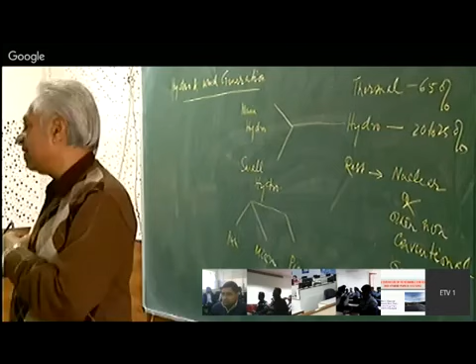It can further be classified into mini, micro, pico, etc., depending on the size of the hydropower station. Now, it is very obvious when we call this hydro generation, the turbine of a thermal power generation and the turbine of a hydropower generation will be different.

Now, when you have to generate power, you have a prime mover and you have an alternator, is it not? The basic principle is that through a prime mover you give rotational power to the turbine, and when the turbine is coupled with the generator alternator, it produces electrical power. So you need a prime mover and an alternator. The prime mover is basically known as turbine. So the coupled system of turbine and alternator is known as turbo alternator.

Turbo alternator unit, or we also call it a machine. So the turbo alternator machine or turbo alternator unit is the main heart of the system, which feeds the mechanical power to the alternator through the turbine, and the alternator produces electrical output.

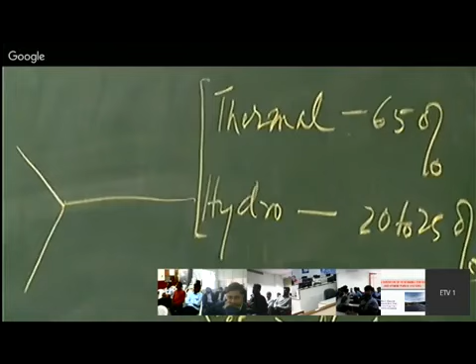Now the question is, if there are two types of generation, thermal and hydro, these are the main ones, of course. The machines will be the same, the principle will be the same, but they are different in configuration, in shape, in operation, etc. Can anybody tell me the basic difference of a thermal machine and a hydro machine? Suppose I have shown you one machine, say A, and another, B.

One is a turbo alternator unit meant for hydropower generation. Another is meant for thermal power generation. A is meant for thermal, B for hydro. Looking at it physically, can you tell that this is a thermal power machine and this is a hydropower machine? They are definitely different machines. Principally, they act the same way. But what is the physical or structural difference between the two?

Hydro machines are smaller as compared to thermal machines. Smaller. Speed is large. Hydro machines are run by a water surge system.

I am just saying that if you see the construction by its physical look, A is there, B is there. Can you say that A is a thermal machine and B is a hydropower machine? By looking at the turbines, by looking at the unit, I am saying.

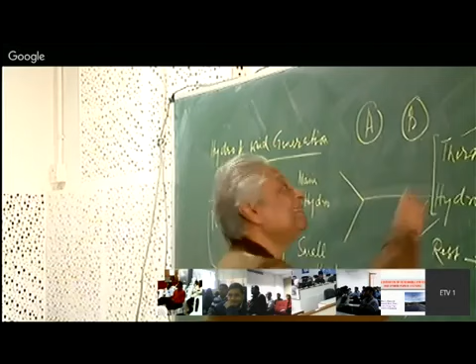The steam turbine and the water turbine, or hydro turbine. This is the steam turbine. The turbine which is used for thermal power generation is known as a steam turbine, and the one which is used for hydro is known as a water turbine. Now, it is obvious that the steam turbine will be a much higher speed machine, and that has to feed mechanical power to the alternator, that is, the AC generator of thermal power generation.

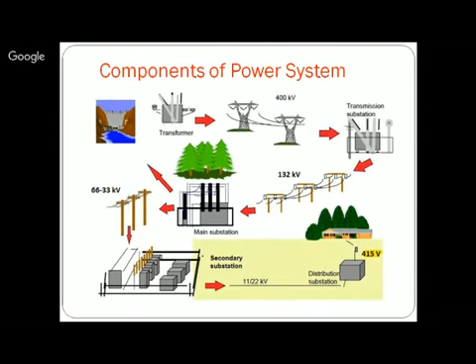Now these are the components of power system. You can very easily see the components are there, the fossils are there, transformer is there, then lines are there, then transmission substation is there, your transmission lines are there, 415 volt, secondary substation, etc. Next.

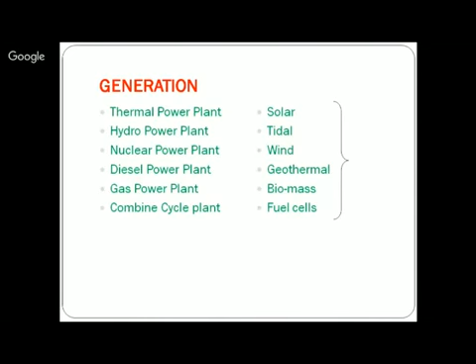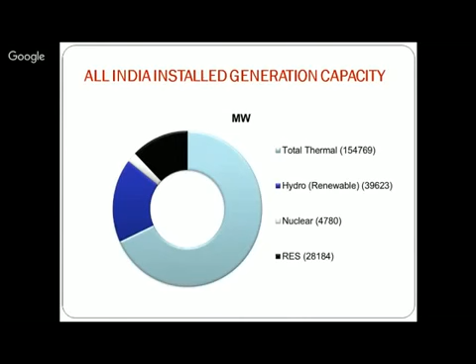Next, all India installed generation total is 15... This was earlier, I think 154769. Hydro was this much, nuclear was this much, and rest was this much. It's an old style. Next. Breakup generation. Installed capacity of power plants in India at the end of year 2013 was 2,33,929. But now it is 284. 284 is the latest. The thermal was 68%. The hydro was 17.42. The renewable contributed next 12.39 and nuclear only 2.1%.

So you know that although nuclear technology is a very old, established technology, its efficiency is very very less. आजकल हम लोग क्या बोल रहे हैं reactors, कौन से reactors? Nuclear reactors are there. Fast breeder, hybrid reactors. तो उसके अंदर न्यूक्लियर में आपका fission and fusion दो processes होते हैं. One is known as the fission process, the other is fusion. Fission process is the older one जो हमारा चल रहा है. When there is a bombardment, the nucleus is broken, and that radiates energy. उस energy को हमने use करना है for heating water, isn't it? Instead of burning coal, I am using this bombardment process.

और अगर इसको हम कूल ना करें, इतना ज्यादा एनर्जी आ जाएगा तो क्या कर देगा? न्यूक्लियर आपने पढ़ा है? So there is heavy hydrogen used to cool the process. Heavy hydrogen, heavy water बोलते हैं इसको. Deuterium, D2O, that is heavy water. Heavy water is used for cooling down. That means जो एनर्जी है उसको थोड़ा स्लो डाउन करता है. चेन रिएक्शन को स्लो कर देता है. स्लो करने से आपकी उतनी एनर्जी नहीं रेडिएट होती. अगर ऐसा ना करे तो क्या होगा?

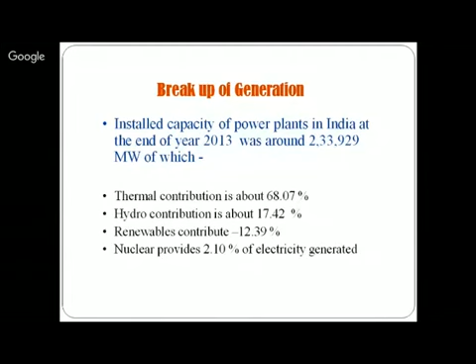This is the irony. I was telling you that per capita consumption is important. It is not that you have generated 2,84,000 megawatts or 284 gigawatts. आजकल गीगावाट से भी ऊपर जा रहा है. टेरावाट्स बोलते हैं. But what is the use?

इतना ज्यादा पॉपुलेशन है, इतने अधिक कंज्यूमर्स हैं आपके, that many people do not know what is electricity. Still, many people in the country do not know what is electricity and what is its application. जबकि हम ज्यादातर लोग जो शहर में रहते हैं, or some elite class, we are electrically driven. As I said, your every step goes with the help of electricity. But there are still people who do not know what is electricity and how it functions. तो ये irony है. So per capita consumption is very less. This is very important. Next.

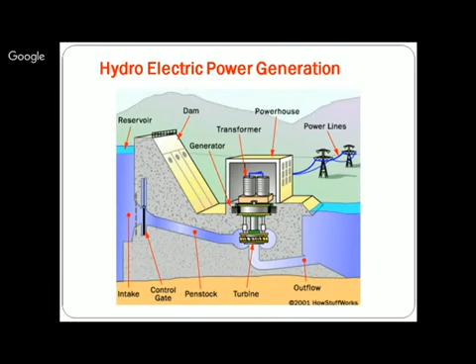So this is the way, that is the turbine, and the turbine, as I said, is a low speed machine. So the number of poles are more. It is a salient pole machine. High number of poles; non-salient machine has fewer. So output like this. Next, major hydropower plants in India. It is in fact the case that major hydropower plants in India are situated in regions of major rainfall.

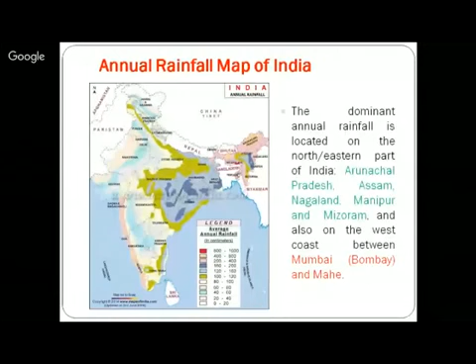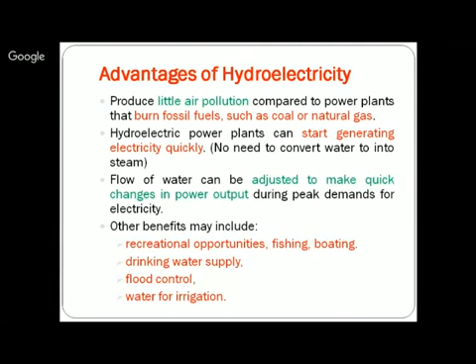Disadvantages, of course: hydroelectric power plants that require the use of dams can really affect the flow of rivers. कई नेता लोग उसको अपोज करते हैं ना, इकोसिस्टम को अनबैलेंस करता है। But at the same time, if you go for it further, that fuming is not there. NOx, COx, SOx, ये सब होते हैं ना flue gases. NOx means nitrogen gases, then sulfur gases, then carbon monoxide, carbon, ये सारी gases they are very poisonous and they may even cause cancer.

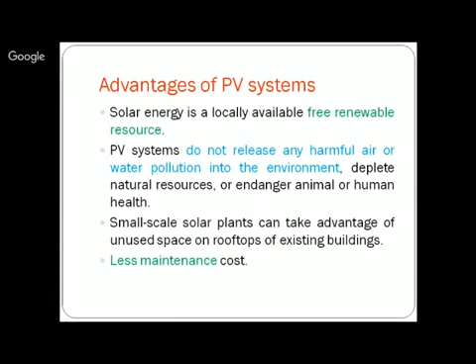Free and available. So free energy. It's a neat energy, right? It's a very neat energy. Pollution free. That's very neat. Less maintenance cost. Next, disadvantage यही है कि variable energy source with energy production.

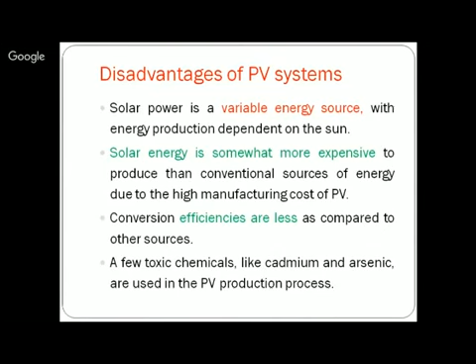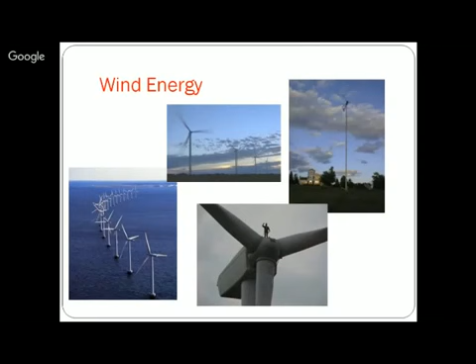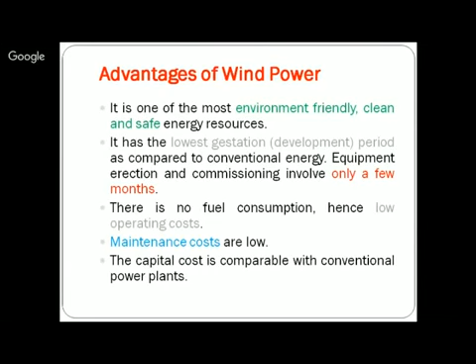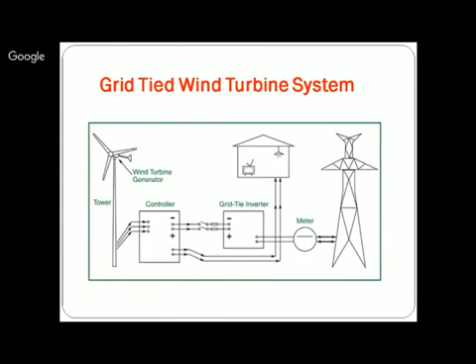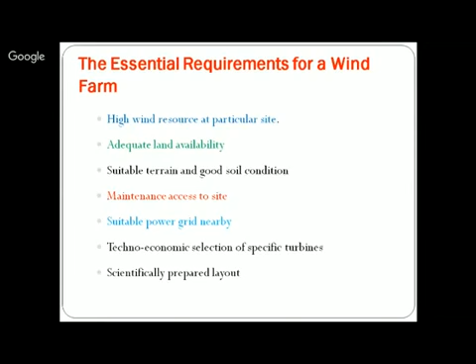I have seen in Gujarat all wind grid connected. I don't know whether other states have. Tamil Nadu probably have done it, but Gujarat में बहुत अच्छा किया. Next. So the essential requirements for a wind farm are the high wind. Farm में क्या चाहिए? High wind, of course. Then adequate land. Terrain must be suitable. Then maintenance, then techno-economic selection of specific turbines, scientifically prepared layout, etc. Okay.